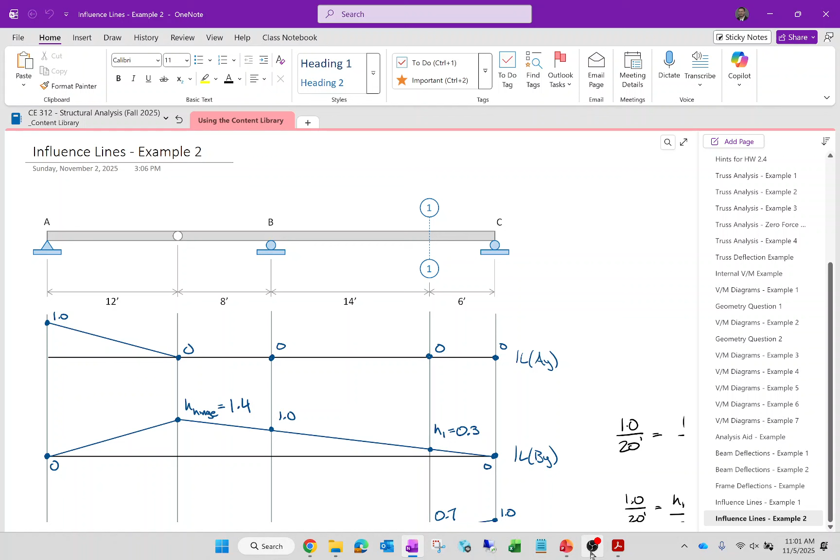It's a pretty easy find. So I'm going to Walmart today. If I find it, I'll take a picture and email it to you. Okay, all right. That's a really good question, but time already started.

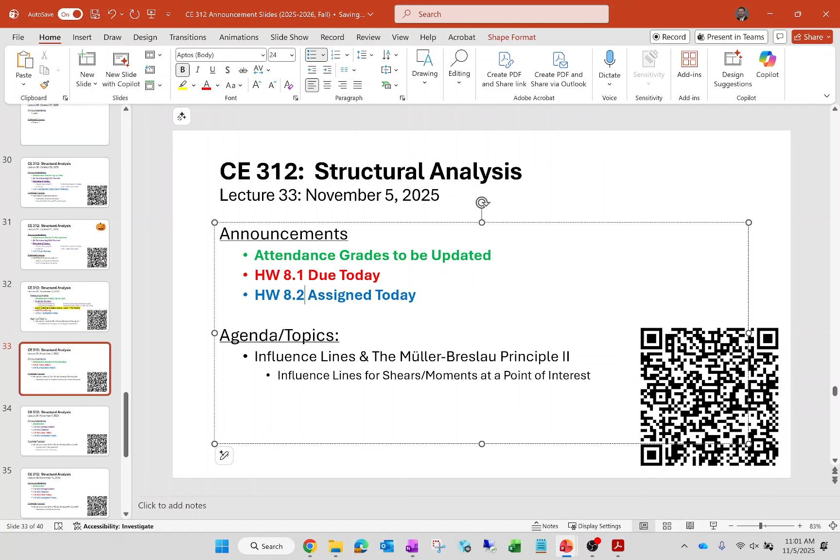Then my announcement slide didn't sync. I don't know what's going on. Okay, well, all right, hold on. My announcement slide didn't sync. I don't know why. We all get 100% on our exams? Nope. No? That's the math thing. Well, I'll just do this. I mean, I don't know. Yeah, it didn't sync for some reason. I don't know why. Okay, because I had it ready to go.

Oh, well. Okay, everybody, let's get started. I'm still working on grading the second exam, but I'm still working that out. As you could probably guess, it's a hectic week for registration. So I am mostly interested in how we talked a little bit about it before class started, but how did homework 8.1 go? Was that pretty smooth? Okay, good.

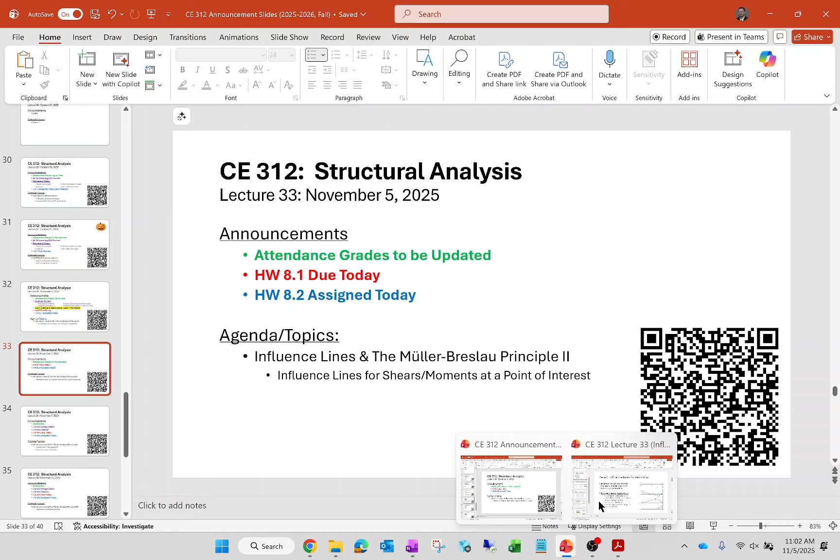I want to be clear on the topic for today. So when we drew influence lines for reactions, and maybe what I ought to do is just jump right into the slides. Did everybody get the code? Let me jump right into the slides because I don't want to take away from this topic too much, because essentially the whole thing about today is I presented to you a set of rules for influence lines for reactions. And now I'm going to present you a different set of rules for determining internal shears and moments. The rules make sense when you're thinking about internal shears and moments, but they are a little bit different than the rules for reactions.

So I want to make sure we've got the context in mind. First off, let's just make sure that we're all clear about the base definition for an influence line. Now, just like last time, we're going to try and divert to the Müller-Breslau principle, but just remember the idea behind an influence line is that it is the record of a given response when you move a unit load across the structure. So you pick a point of interest, you move a load across the structure, and you record that response. Okay? And I do want you to keep that in the back of your head. Now, that is a very nice theoretical underpinning, and it is a very nice gut check for the construction of an influence line. It's how we would do things like the influence line for a given reaction equals 1 at that reaction and 0 at all other reactions, right? Because that's what you're doing. You're moving the load.

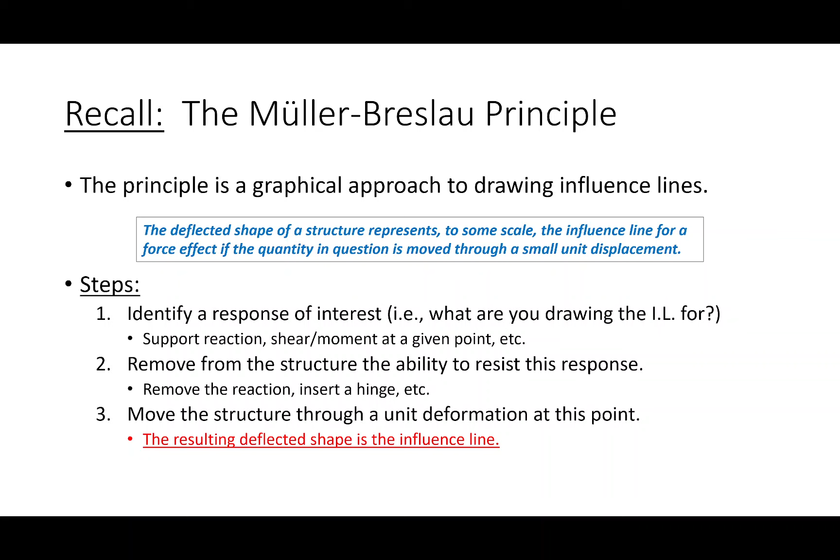So that was sort of a way that we developed that rule. But ultimately, we were using the Müller-Breslau principle to construct the influence line. And so what do we do with the Müller-Breslau principle? We remove from the structure the ability to resist whatever response we're looking at, and we move the structure through a unit deformation. Now, in the case of reactions, what we were doing is we were taking a structure and we were saying, okay, let's take this structure and remove this roller, or remove that roller, or remove that roller, etc., and move it through a unit displacement, okay?

I got a little Desmos friendly the other day, and even this morning. I posted a link to this, so you all can mess with this if you want. But I'll show you something. So the way it works is if you look over here on the left, there's this thing called scaling constants. And so the way a scaling constant works on this graph is, so for example, if you say CA, and I take CA and I do that, what it does is it plots the influence line. And so this is CB, etc.

But just to sort of walk through what we're doing here, so this is support A, this is support B, this is support C. So let's consider the influence line for the reaction at, let's say, C, okay? So what would we do? We would remove this support, okay? So if you want, you could get kind of fancy with it. We could say, okay, let's remove that support. So that support's gone. And then we're going to move this through a unit displacement. But see, we have a hinge right here. So if I take this point and I pick it up 1, okay, what's going to happen is it's just going to do that, right? And so that's the influence line for the reaction at C, okay?

Likewise, if I say, okay, let's remove support B, okay? So if I remove support B, okay, what's happening is I'm going to take this point and lift it up 1. But keep in mind, it's still pinned here, and it's still pinned here, and here's my hinge, right? So what's happening is, with support B, that hinge is where it's changing location. Okay, does everybody see that? Okay.

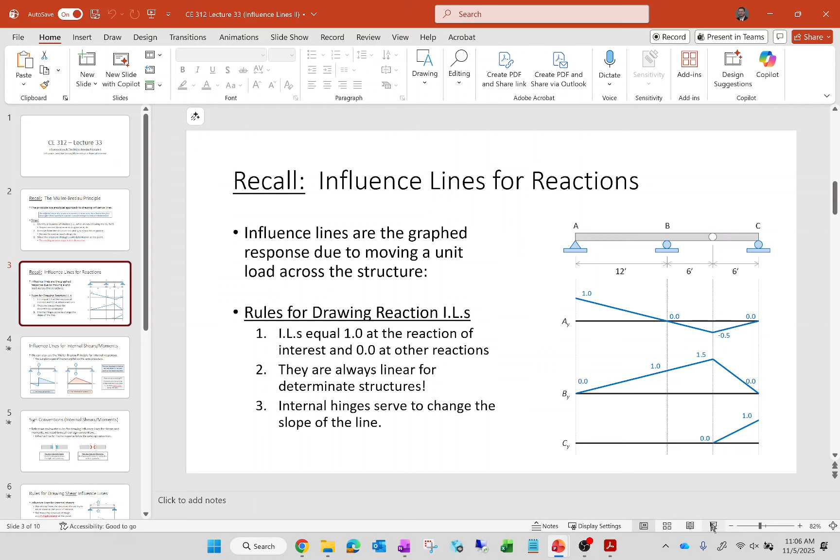And then with A, we're just pivoting around that reaction. Okay, all right. So that's fine for the construction of influence lines for reactions. And there were rules that we developed for influence lines for reactions. We know that they equal 1 at the reaction of interest and 0 at all other reactions. We know they're linear, and we know whenever we have a hinge, it serves to change the slope of the influence line. Okay? That's fine for reactions.

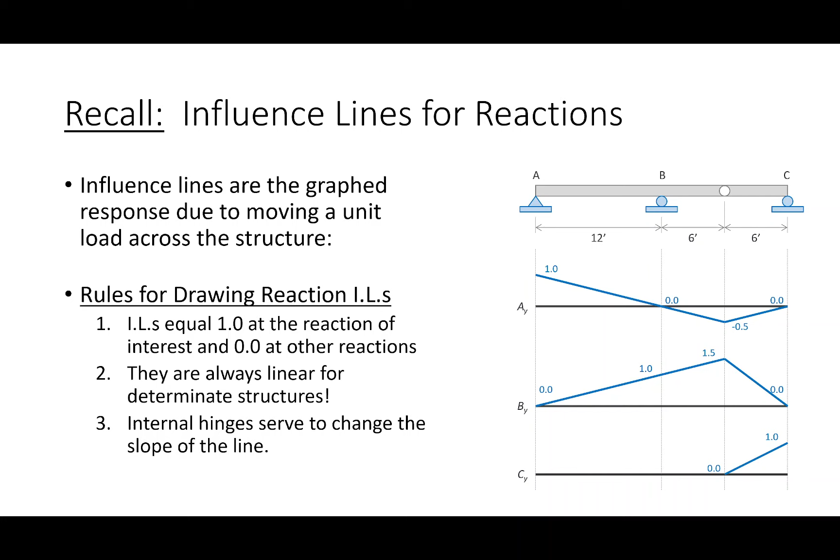For shears and moments, those rules are slightly different. Okay? So let's talk about influence lines for shears and moments. Like I said, one of the drawbacks for an influence line is you cannot draw an influence line for a shear and moment everywhere along the beam.

And that's the inverse of what happens with a shear and moment diagram. See, when we plot a shear and moment diagram, what we're plotting is the change in shear and moment across the entire structure. So when you look at a shear and moment diagram, here's the beam, the value here is the shear here, the value here is the shear here, and so on and so forth. So it's a continuous plot of the shears, a continuous plot of the moments across the entire structure. That doesn't work with an influence line.

With an influence line, what you're recording is the load's position everywhere, but your point of interest remains fixed. So whenever you draw an influence line for shear or moment, it is the response at a given point. So when you draw an influence line, it's the influence line for the shear here, or the moment here. So you keep your eye fixed on that point as the load moves across the structure, okay? But the idea is the same. The theoretical underpinning, we're moving a load across the structure, etc.

Now before I show you this, let's have a little bit of a thought experiment here, okay? If I put a load right there on top of A, what is the shear here? Think about it like this: imagine I've got a table and I'm sitting right on top of the leg of the table. How much bending or shear is the table seeing? Nothing, right? So if I'm drawing an influence line for shear and moment, I'm already thinking of a different rule. Whenever I draw an influence line for shear or for moment, would a fair statement be that it has to equal 0 at all reactions? I mean, is the beam seeing any shear or any bending if the load's right here? No, right? Okay.

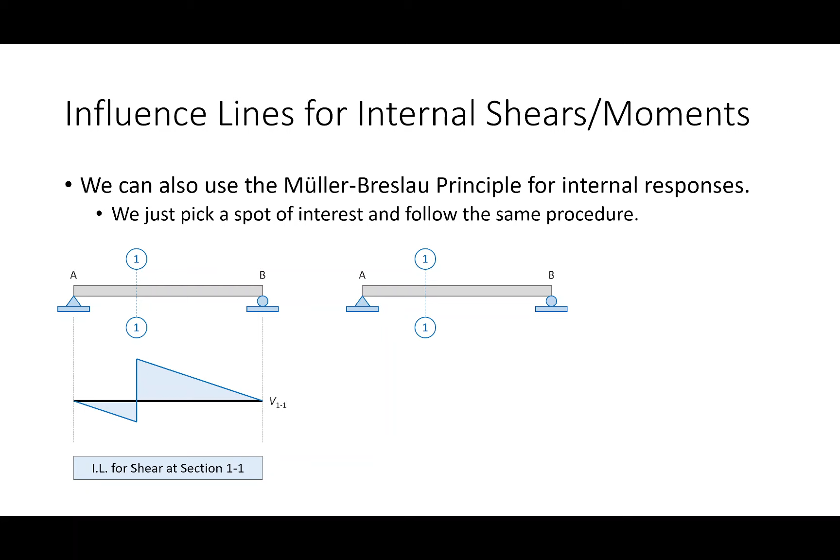All right, so that theoretical idea is in the background. This is what they look like, and then we'll talk a little bit later about how to construct them. So whenever you draw the influence line for shear, it looks something like this. What happens is you have this jump, this tendency to jump downward on the left, and this tendency to jump upward on the right. And then for moments, you have a tendency to rotate this way on the left and this way on the right. Now, why does it go like that? Why this direction? Why this sign convention?

Because what we're doing is mimicking the internal sign convention that we've been using this whole semester. For example, if I have a beam, and I cut a section with the samurai sword or lightsaber and I split it up like this, if I look over here, what's positive shear? What have I been saying positive shear is? If I cut a section and look to the left, positive shear is, I'm waiting, down. Upward shear up here is positive. This is positive shear. So cutting a section looking to the left, downward shear is positive. Cutting a section looking to the right, upward shear is positive.

Well, if we look at our influence line at our point of interest, we're tending downward on the left, upward on the right. Is everybody seeing that? It's sort of doing that. Now, I'm using some very specific language here. I'm not saying that it always goes down on the left and always goes up on the right. What I'm saying is it's tending downward on the left, tending upward on the right. And the reason I'm being a little wary with my verbiage there is because of cantilever beams and fixed supports, which we're going to talk about on Friday. So for now, you can think that this is going to go down and this is going to go up, but recognize come Friday, that's going to change.

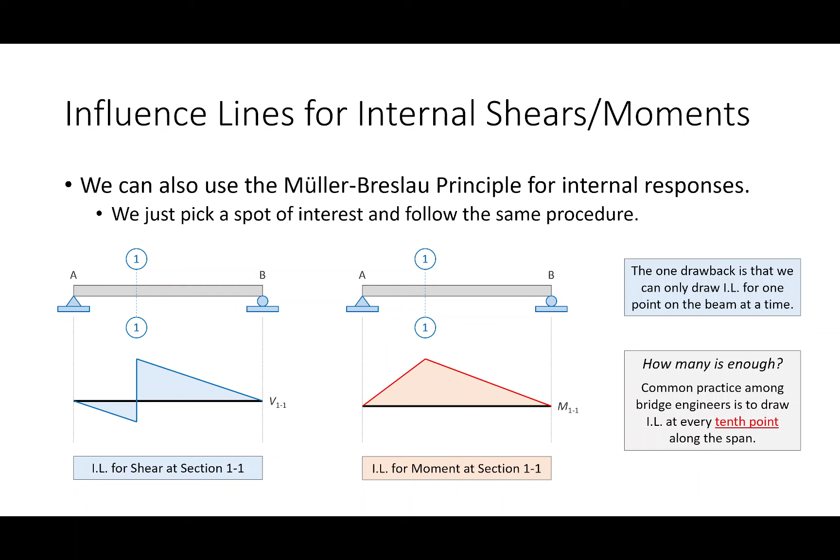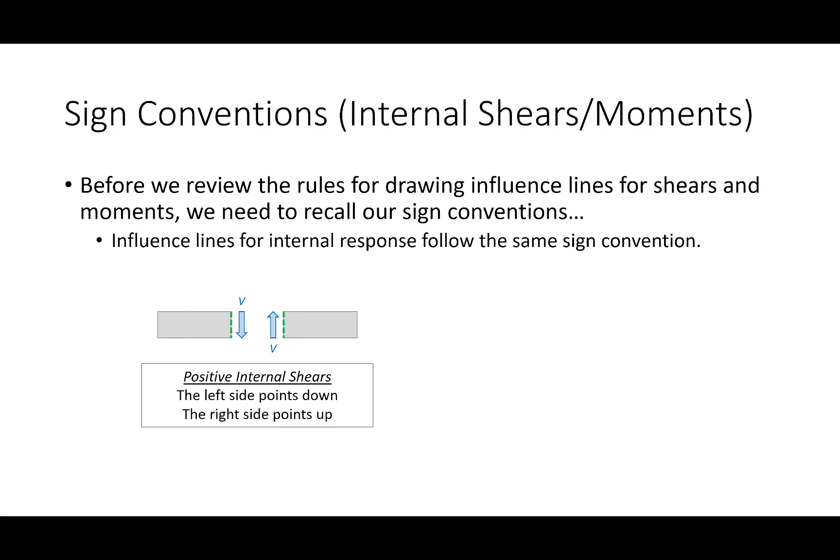Okay. So some sign conventions. Here I am stealing my own thunder. Positive shears: the internal goes down, the left side goes down, the right side goes up. Moments go that way and that way. Okay, so let's take them one step at a time. Let's talk about influence lines for internal shears. So let's go back to the Müller-Breslau principle. What does the rule say?

We pick a point of interest. Well, we've done that right here. We remove from the structure the ability to resist that response. So in that case, we're removing from the structure the ability to resist shear right there. So if I'm looking at this structure, what we're essentially doing is installing what's called a shear release. We basically put this release in the structure right there that prevents the structure from resisting shear. Now, it can't resist shear, but it theoretically could resist axial loads or moments and so forth.

Okay? Now, what we would then do is take that structure and put it through a unit displacement. So here's my shear release. We remove from the structure the ability to resist shear at a point of interest, and then we put it through a unit displacement. So what does that mean? Well, we're going to move the left side downward and the right side upward. So the left side is going to go down, the right side is going to go up.

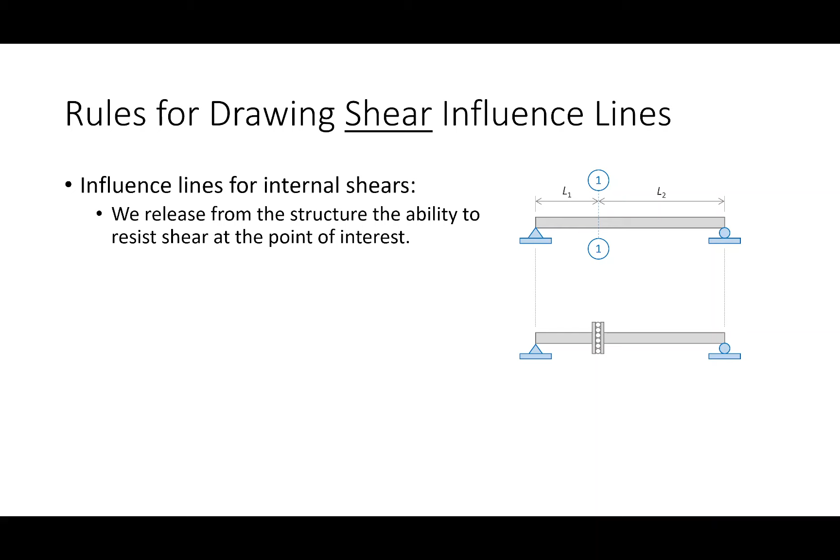Now, one of the quirks of a shear release is that it is just that. It is a shear release and nothing else. Okay? And so the way that mechanistically that will work, let's go through a couple things. First off, we're moving it through a unit displacement. So what does that mean? I want a total displacement right here of 1. So if I do a little bit of geometry right here, what I'm saying is that this total displacement is 1. So when we construct an influence line, what we're going to be interested in is figuring out what is H1, what is H2. Well, I don't know what H1 and H2 are, but I propose the sum of them is 1. Everybody okay with that?

Now, like I said, it's a shear release, it's not a moment release. So the way that we constrain this from only releasing shear and not moment is that this line and this line have to have the same slope, okay? So if this line and this line have to have the same slope, how do we get the slope of this line? Rise over run, so H1 over L1, and H2 over L2. And we can solve. You don't have to get super worried about writing down these expressions, because when we start doing a problem, you'll see how we can naturally come up with these, and it's really not that bad. A little bit of algebra, but once you get this, it's pretty straightforward. Ultimately, what you need to keep in mind with a shear influence line is that the total jump is 1, and that line is the same slope. Okay? Everybody okay with this?

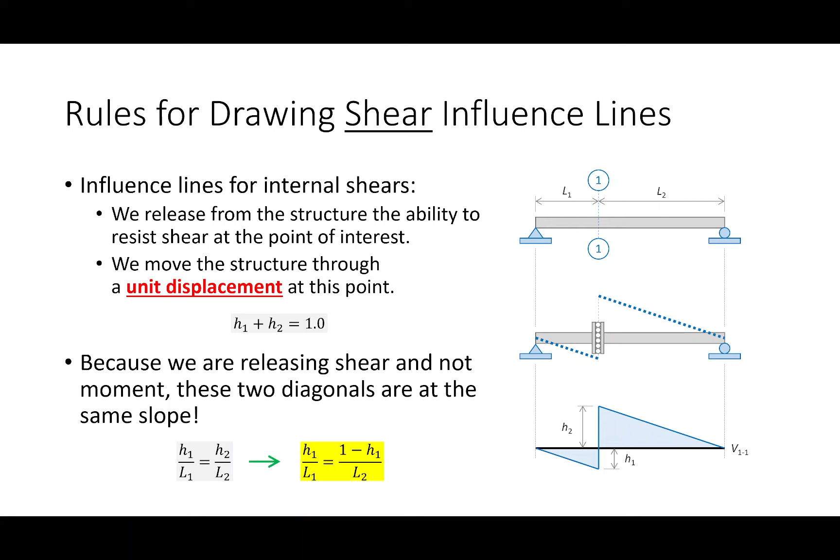All right, now let's look at moments. For moment influence lines, what we're going to do is remove from the structure the ability to resist moment. So let me ask you a question. If I have a structure and I want to pick a point and say I don't want that point to be able to resist any moment, what should I put at that point? Like, what should I put here to prevent the structure from being able to resist moment? A hinge, exactly right. So I will put a hinge right there, okay? So I remove from the structure the ability to resist moment, so I stick a hinge right here, okay?

Then I take the point and I move it through a unit displacement. But in the case of moments, I'm not interested in a unit displacement as much as I am a unit rotation, okay? Now, we have used the term rotation and slope interchangeably. So how does that work? Well, I'll show you over here. But in the case of moments, we're sort of doing this. We're going to pick this point up some. So keep in mind we're pinned here, pinned here, pinned here. So we're going to rotate this side up, rotate this side up, and we're basically going to pick this point up like that. Then over here, it's going to seesaw around this. There's a hinge, brings us back up, okay? And that's going to be what the influence line looks like, okay?

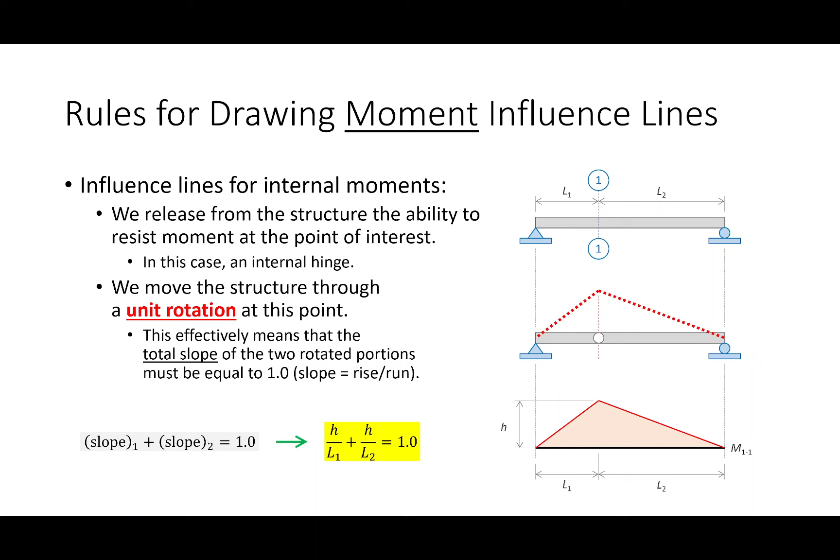Now, how do we actually get values? Or more specifically, what do I mean by a unit rotation? What I'm saying is that this total angle change right here needs to be 1. And how do I figure that out? Well, it's actually pretty easy. How do you figure out the slope of that line? What's the slope of that line? Well, it's whatever that height is divided by, we'll call that L1 and L2. And then this is whatever that rise is divided by whatever that run is. And I propose that the sum of these must equal 1. Does that make sense? So we take it, we rotate it up, we move it through a unit rotation, we get a height, an L1 and an L2, and again, I'm just saying that the total slope has to equal 1, okay? So we'll say rise over run, and now all you have to do is plug this in and solve for H, and you've got the influence line figured out, okay? And again, does this match what we would expect if we were to animate this thing?

Well, let's see. If we have the structure pin, already a hinge here, stick another hinge there, got a solid segment, stick a hinge at our point of interest, and that's what it's going to do. Does that make sense?

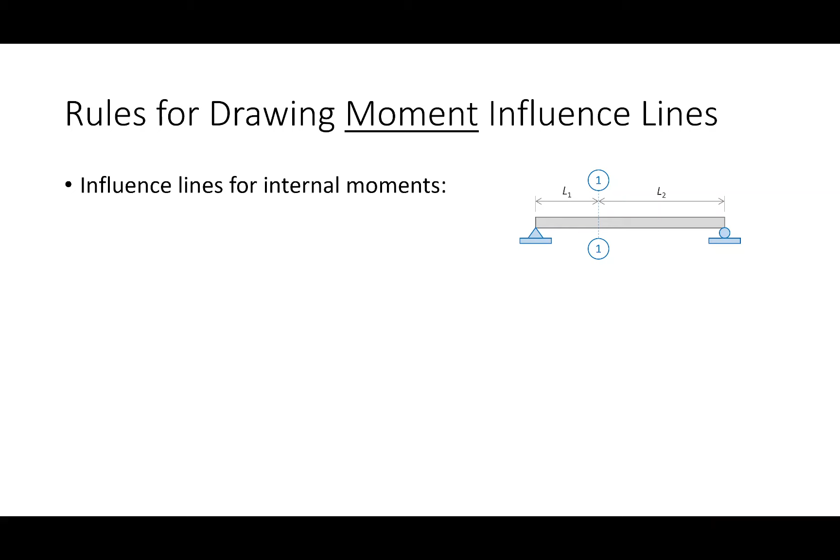What's the same between influence lines for reactions and influence lines for shear and moment diagrams? Well, they are linear. They are lines. So that's the first thing that's common. The second thing that's common is that if there's an internal hinge, it'll change the slope of the influence line. What's different is this rule, okay? When you draw an influence line for reactions, they equal 1 at the reaction of interest, 0 at all other reactions. But when you're drawing an influence line for shears and moments, they are 0 at every reaction, okay? Does that make sense?

What does it mean for a slide to be hashtag Instagrammable? It means that I'm a dork. That's what it means.

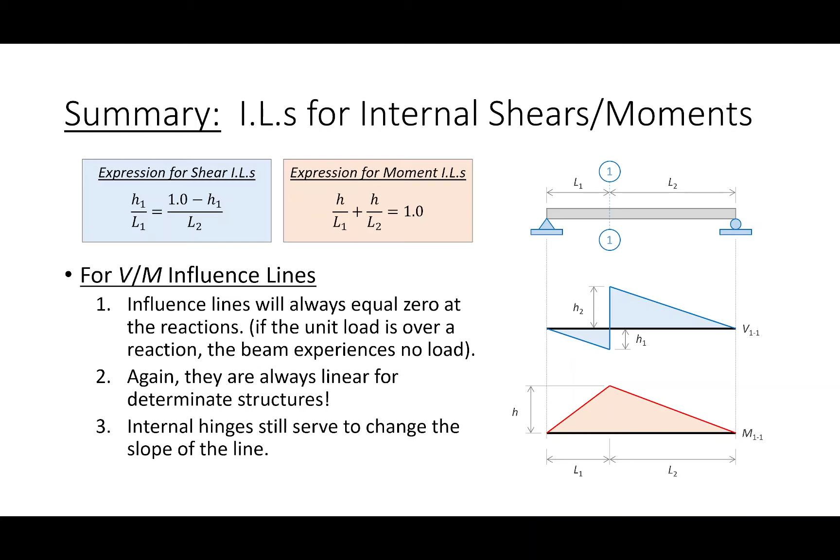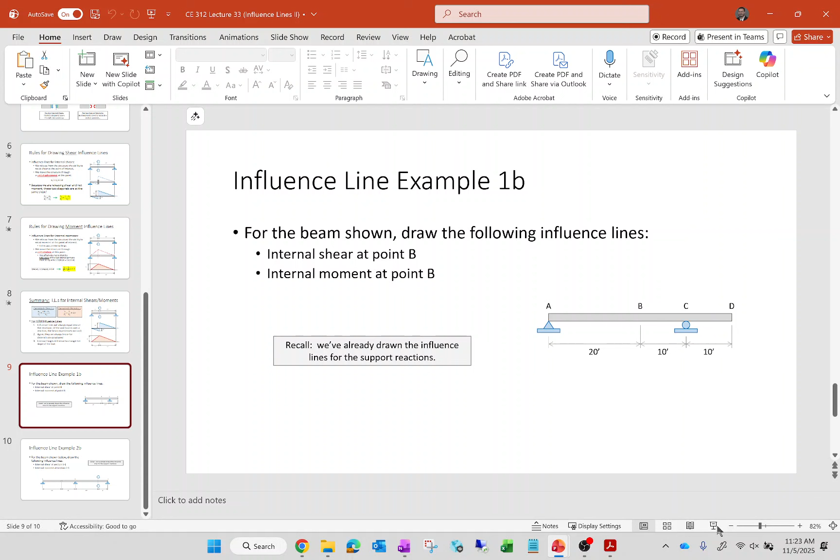Okay, so now what I want to do is go back to the problems that we did last time, and I want to construct internal influence lines for shears and moments. So we're going to go back to these problems, and I don't want to say do them again, but we're going to take the same structures and look at them a little bit differently.

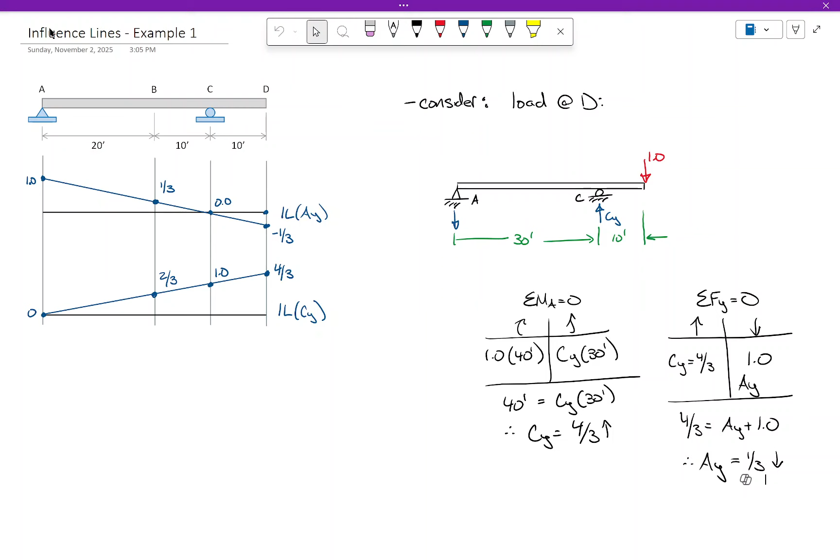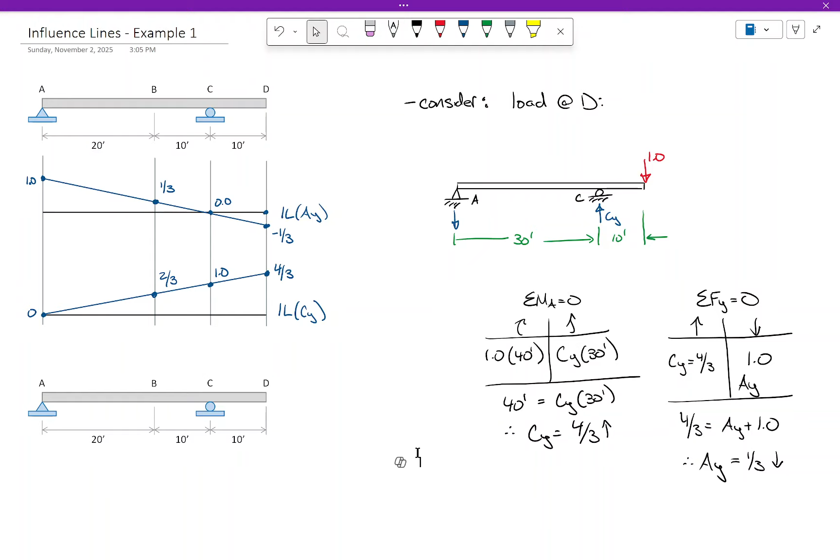So I want to take this beam, copy, paste. You could put it right there. I'm just being kind of lazy here. I'll just draw them again. Okay. So what we're going to do is draw influence lines for shears and moments. For this one, we're going to draw them at point B.

The textbook will say either at a point or at a section, so that's why these two examples have both of those notations. I think in practice I usually say a section, like section 1-1 or section 1-2. Actually, usually what I'll do is say like 0.1L or 0.2L or something like that. That's what the bridge engineer in me does.

Okay, so let's draw our influence line for shear first. And then we'll do the influence line for moment. Okay. And I'm going to do this just to separate all the calculations we did last time from the calculations I'm about to do.

Okay. So let's make sure we've been paying attention. What is going to be the value of these influence lines at A? What about at C? 0. At the reactions, the influence lines are 0. Okay? So for both of these, 0, 0, 0, and 0. Okay, I'll put the labels up here.

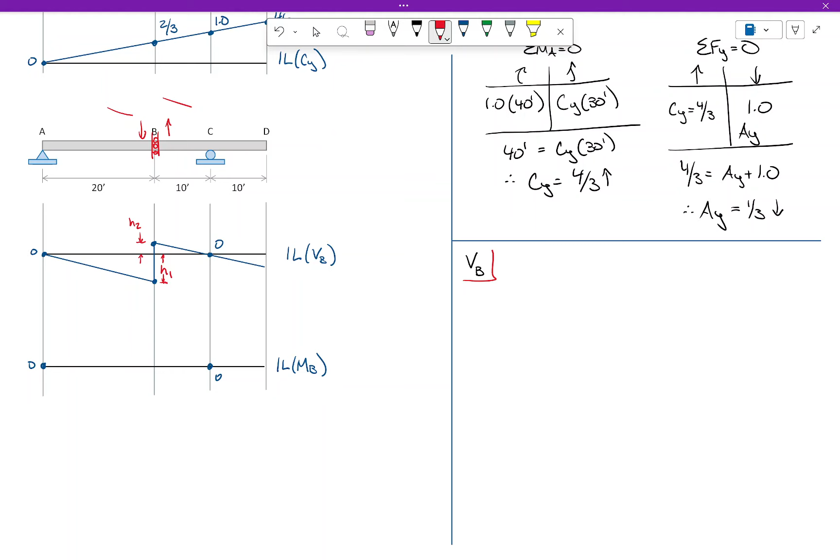Okay, so let's look at our shears. How do we get height 1 and height 2? The first thing I need to recognize is: what does the sum of those two heights have to be? 1. That's the first fact that is true. Oh, 1, not H1. So we'll call this equation 1.

What is the second thing that we know is true? This line and this line are at the same slope. So what is the slope of this line? How would we calculate that? Rise over run. H1 over what? 20. So would you agree that H1 over 20 equals H2 over 10? Is that a fair statement? Okay, so this is equation 2. All this is solving two equations.

Let's take equation 2. Would you agree that if I cross-multiplied, H1 is 20 over 10 H2, or 2H2? All I'm doing is taking the 20 and multiplying it over. If I went too fast on that, let me know. Did I do it right? Yes. Okay.

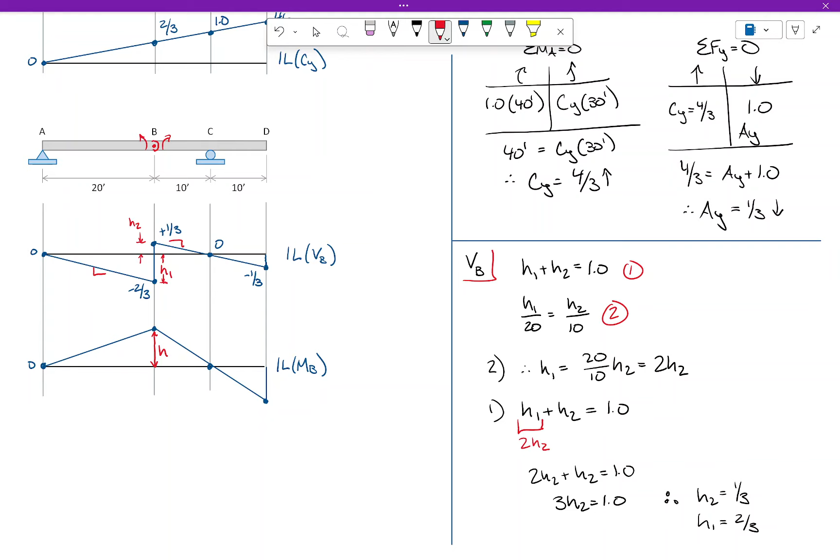But the hard part is figuring out what this height is. We've got to figure out what that is. So how do we do that? Let's see if we can figure that out.

We are moving this through a unit rotation, right? So we have this angle and that angle. What do we know about the sum of those angles? 1. Now, we're using small angle theory here, so we can just represent that as rise over run. What is the rise over run of this line right here? H over 20. What's the rise over run of this line? H over 10.

So now this just becomes a fractions problem. I'm going to say this is H over 20 plus 2H over 20 equals 1. So H over 20 plus 2H over 20 is 3H over 20. So H is 20/3.

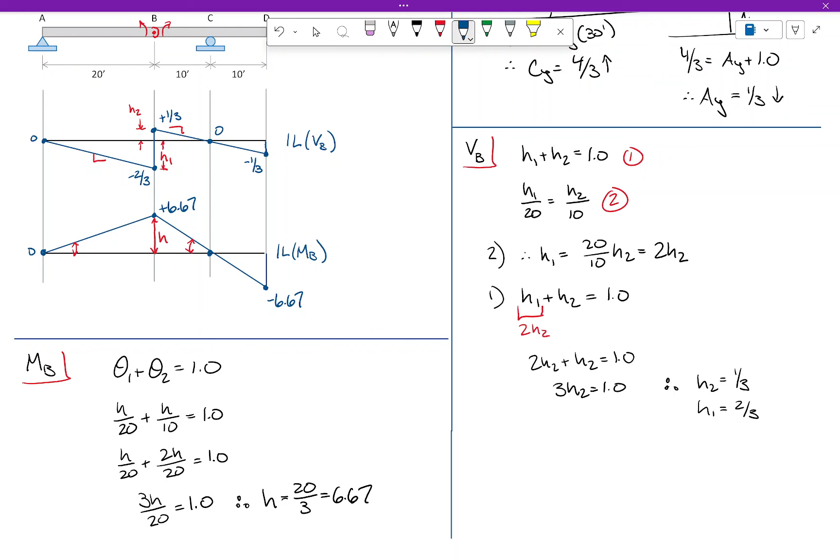Okay. Everybody good so far? Did constructing these influence lines make sense? That's what I'm really interested in your ability to do right now, is just make the things. Everybody good? Let's do one that's a little trickier. Let's do this one.

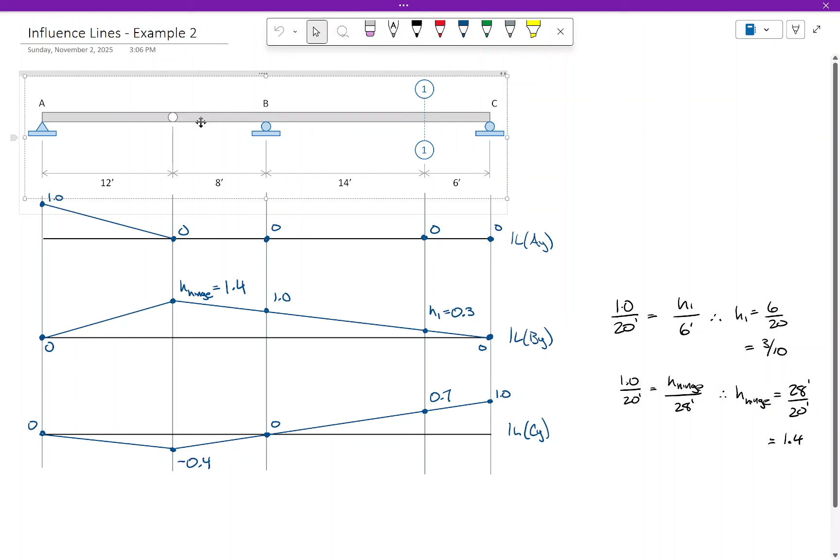Oh, I just want the beam. Come on. Oh my goodness. Okay, well, actually that's probably a little serendipitous because I can just, okay, we'll just do that.

Okay, so here's the beam, and we're going to draw the influence line for shear and moment at that section. Actually, hold on, we'll move that one up. Okay. So let's see what we can come up with here. Let me move this microphone. Okay. So let's do shear and moment. Give me some points that I should indicate right now before I draw any lines.

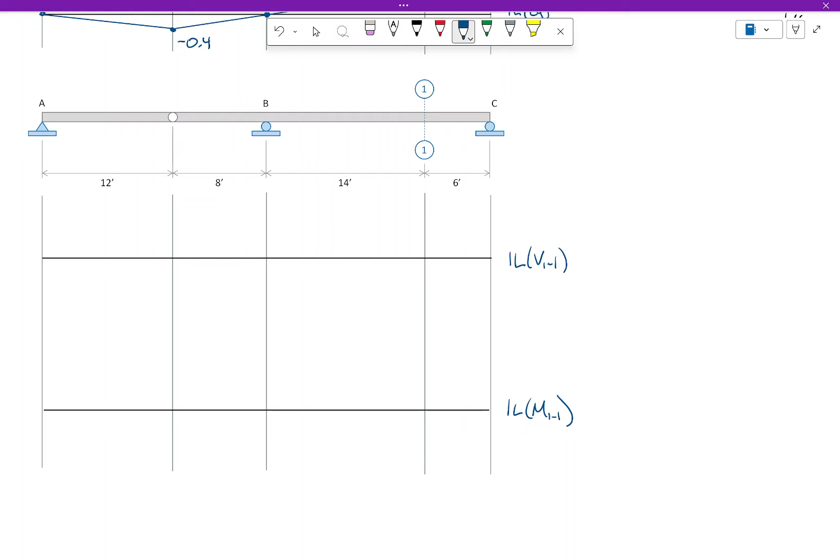What are some values that I know right now without drawing any lines? 0 at the supports. At the supports. Okay. So 0, 0, 0, 0, 0. Right there. Okay. We know that's the case. All right. So let's do shear first. So we're going to install a shear release right here. Somebody tell me what the shear influence line looks like. Tell me what it looks like, let's say, from each segment.

Who's a volunteer? Go ahead. Oh, no, I was still thinking about it. Oh, it's okay. Anybody got an idea for me? Tell me what happens here. What's the deformation look like? What's the left side do?

Here's my release. What happens to the left side? Does it go up or down? Down. Right side? Up. Okay, so let's do the right side first. What's the influence line look like over here? So it's going to be up. What's it going to do? Go down to 0. Just go down to 0.

Okay? Over here, this is all going to be a solid segment, right? So it's going to pivot around this, right? Then we've got a hinge that's going to bring us back. And what can you tell me about these two lines right here? Their slopes are the same. So let's see if I can make this neat.

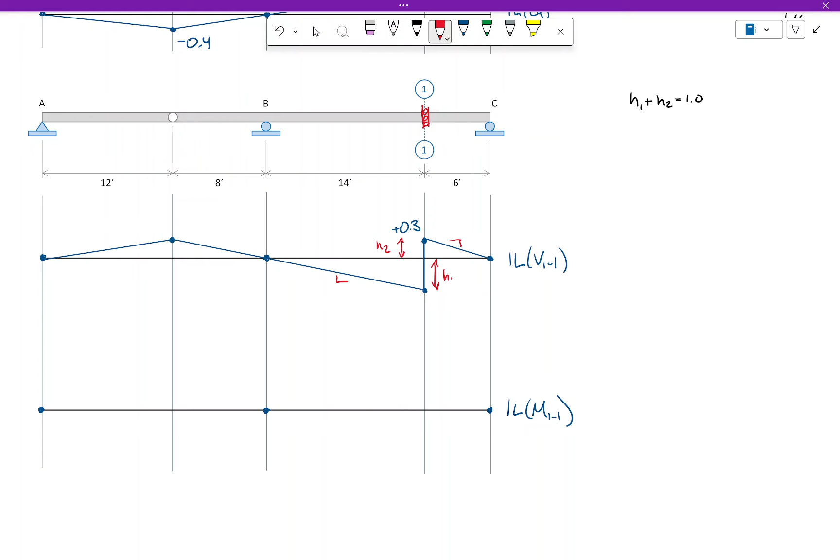So we know that H1 plus H2 is 1. Okay? So that's H2. This is H1. And we also know that H1 over 14 is H2 over 6. It doesn't really matter how you do it, but what I did is I said, therefore, H2 is 6 over 14 H1. So therefore, H1 plus 6 over 14 H1 is 1. So this is 14 over 14, this is 6 over 14, so that's 20 over 14 H1 is 1. Or H1 is 14 over 20, which is 7 over 10.

Does that make sense? Is everybody getting that now? So that makes this negative 0.7. This is 0, this is 0, this is 0. Does anybody know what this is? This is easy. So how do we do this? We say 0.7 is to 14 as, we'll call this H hinge, H hinge is to 8. Does everybody see that? I'm basically saying this rise over run has to equal that rise over run. So what is that going to be in that case? 0.4.